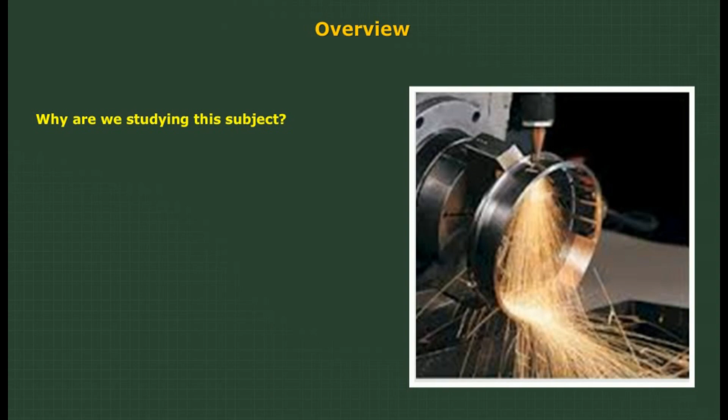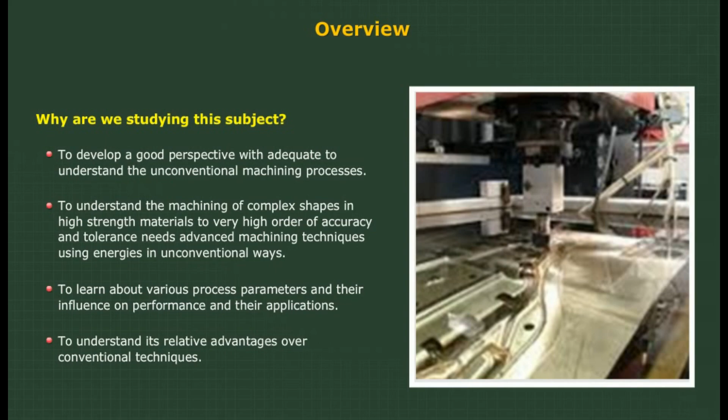To develop a good perspective to understand the unconventional machining processes, to understand the machining of complex shapes in high-strength materials to a very high order of accuracy and tolerance, needs advanced machining techniques using energies in unconventional ways, to learn about the various process parameters and their influence on performance and their applications, to understand its relative advantages over conventional techniques. How is it linked with other subjects or branches of engineering, if applicable?

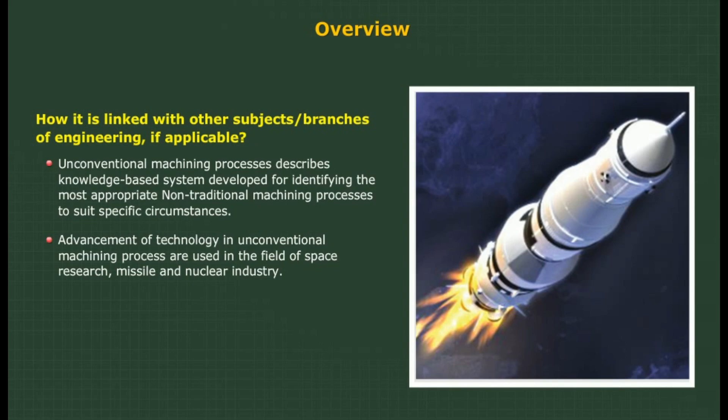Unconventional machining processes describes a knowledge-based system developed for identifying the most appropriate non-traditional machining process to suit specific circumstances. Advancement of technology in unconventional machining processes is used in the field of space research, missile and nuclear industry.

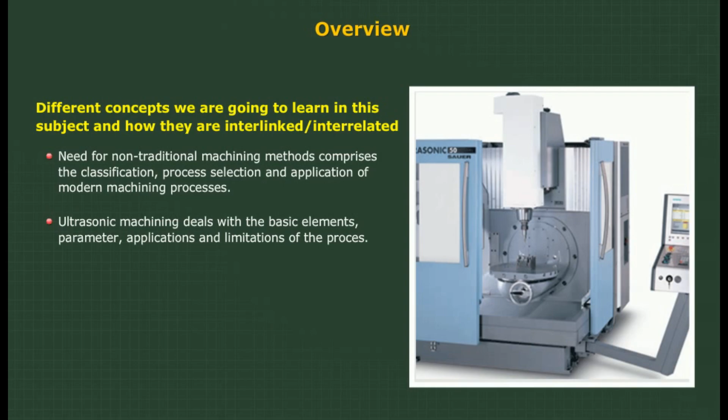Different concepts we are going to learn in this subject and how they are interlinked or interrelated. Need for non-traditional machining methods comprises classification, process selection and application of modern machining processes. Ultrasonic machining deals with basic elements, parameters, applications and limitations of the process.

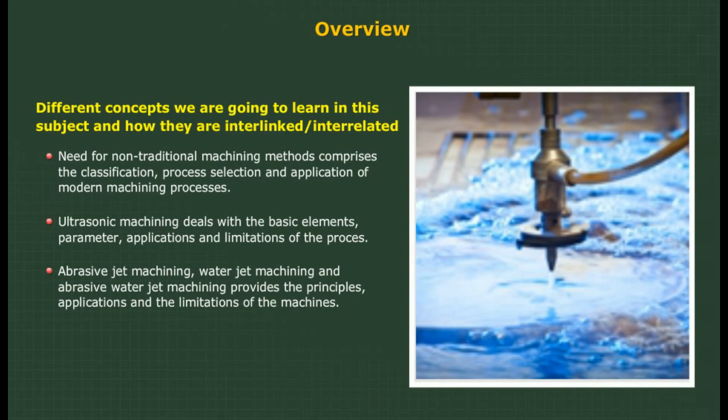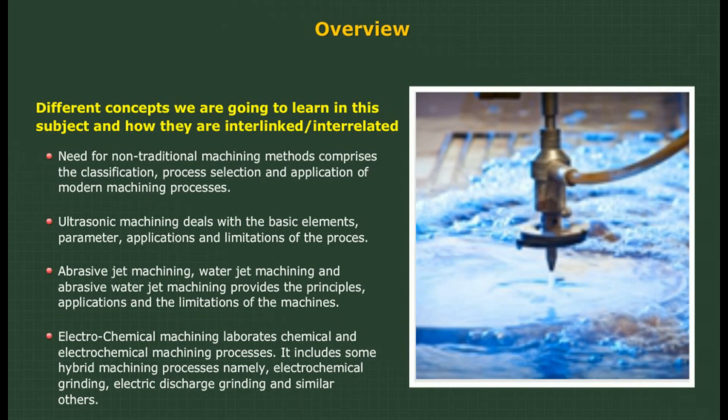Abrasive jet machining, water jet machining, and abrasive water jet machining provides the principles, applications and limitations of the machines. Electrochemical machining elaborates chemical and electrochemical machining processes. It includes some hybrid machining processes, namely electrochemical grinding, electric discharge grinding and similar others.

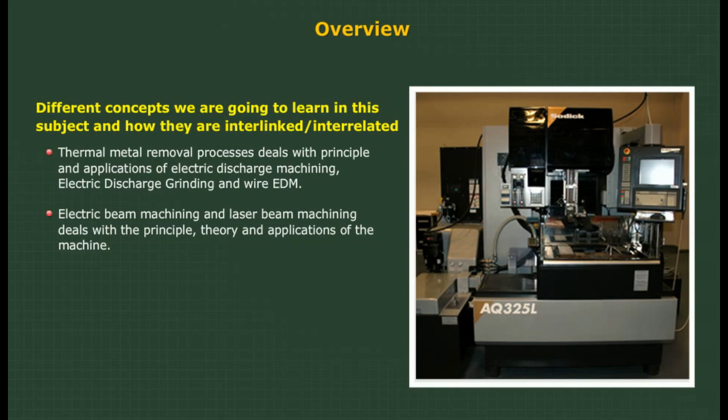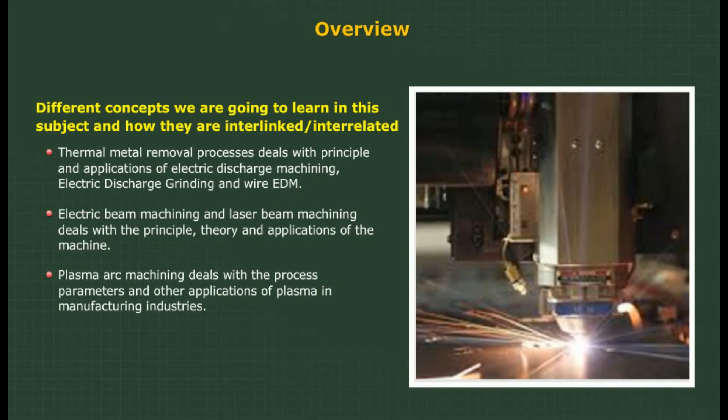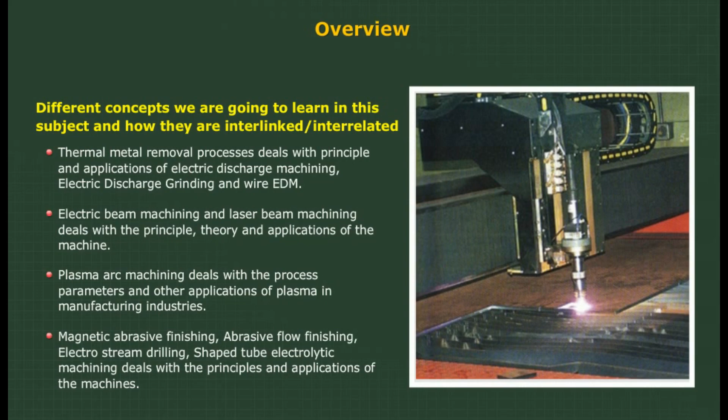Thermal metal removal processes deals with principle and application of electric discharge machining, electric discharge grinding and wire EDM. Electron beam machining and laser beam machining deals with the principle, theory and application of the machine. Plasma arc machining deals with the process parameters and other applications of plasma in manufacturing industries. Magnetic abrasive finishing, abrasive flow finishing, electro-stream drilling, shaped tube electrolytic machining deals with the principles and applications of the machines.

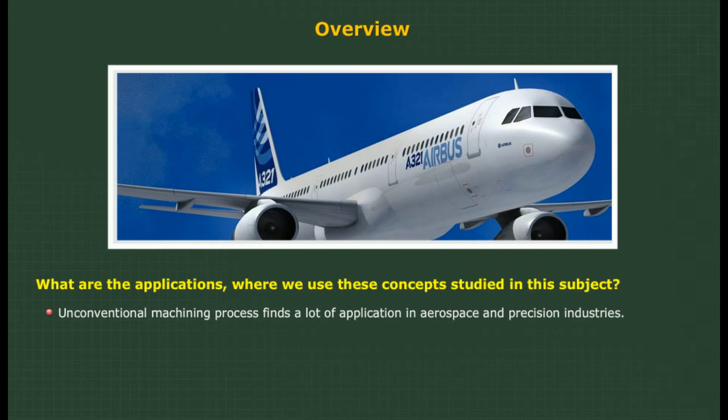What are the applications and where do we use the concepts studied in the subject? Unconventional machining process finds a lot of application in aerospace and precision industries. Advanced materials, more complex shapes, low rigidity structures and micro-machined components with tight tolerances and fine surface finish are manufactured. Rapid technological development in the field of new materials and alloys with ever-increasing strength, hardness, toughness, heat resistance and wear resistance.

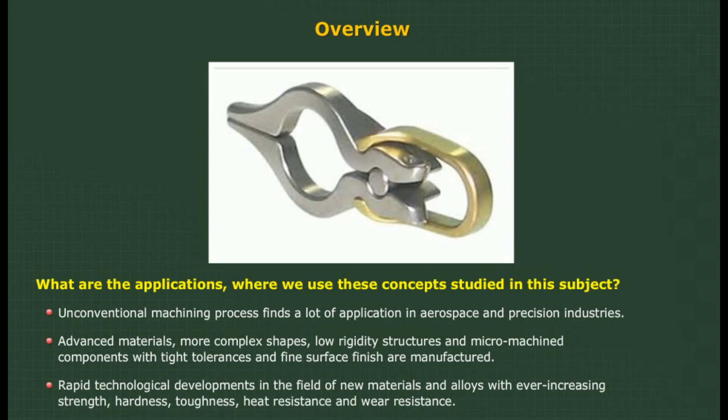Machining processes.

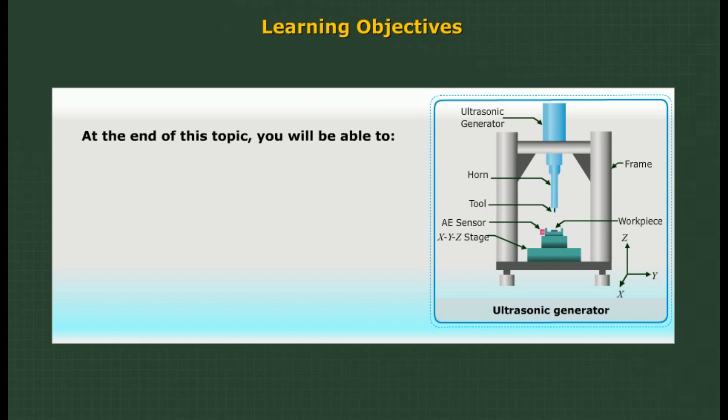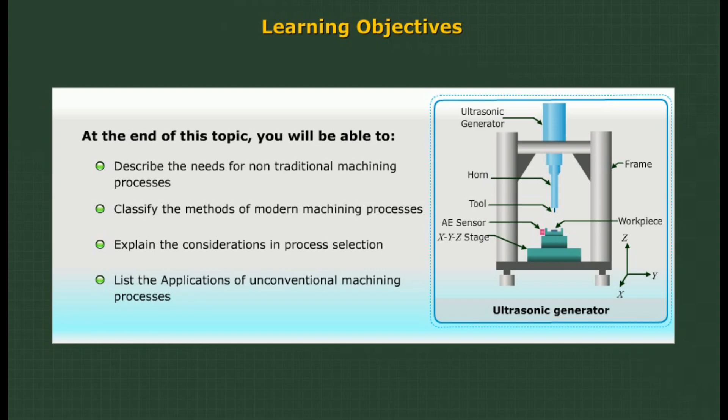Learning objectives. At the end of this topic, you will be able to describe the needs for non-traditional machining processes, classify the methods of modern machining processes, explain the considerations in process selection, and list the applications of unconventional machining processes.

Outcomes. By the end of this topic, you will be able to understand the needs for non-traditional machining processes, discuss the methods of modern machining processes, understand the considerations in process selection, and discuss the applications of unconventional machining processes.

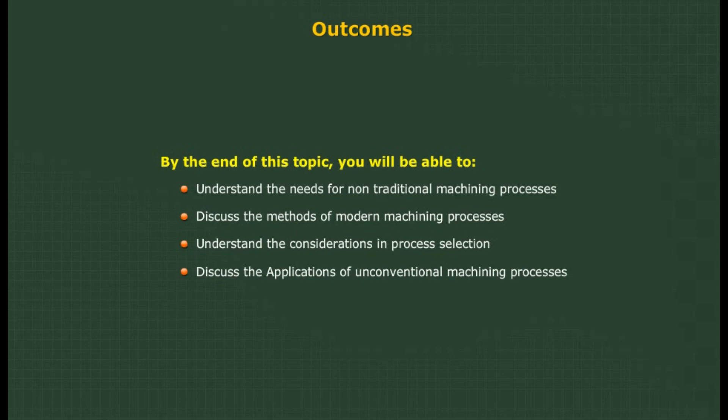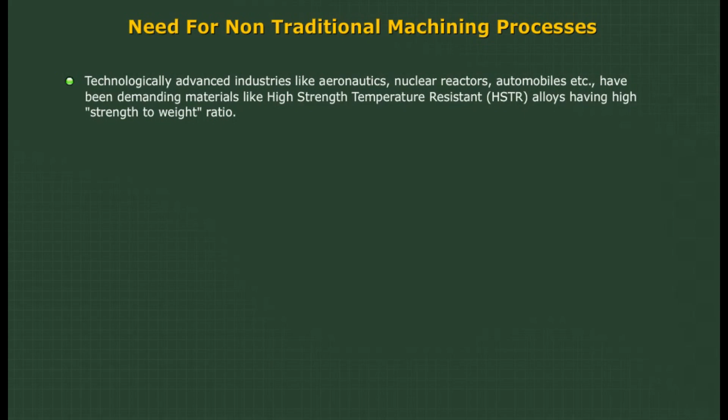Firstly, let us see the needs for non-traditional machining processes. Technologically advanced industries like aeronautics, nuclear reactors, automobiles, etc., have been demanding materials like high-strength, temperature-resistant alloys having high strength-to-weight ratio.

During conventional machining processes, an increase in hardness of the work material results in a decrease in economic cutting speed. This also needs the development of improved cutting tool materials so that productivity is not hampered.

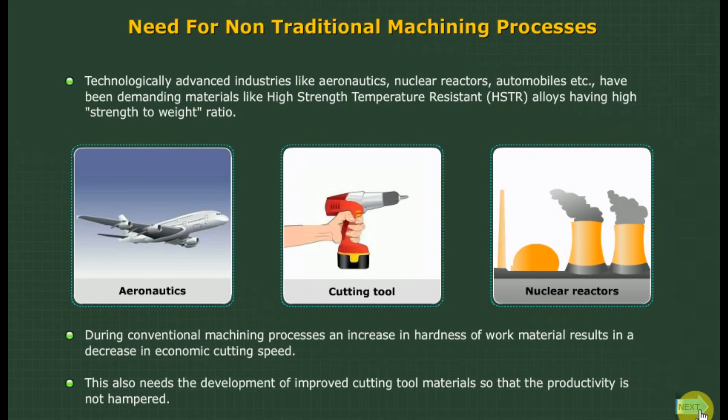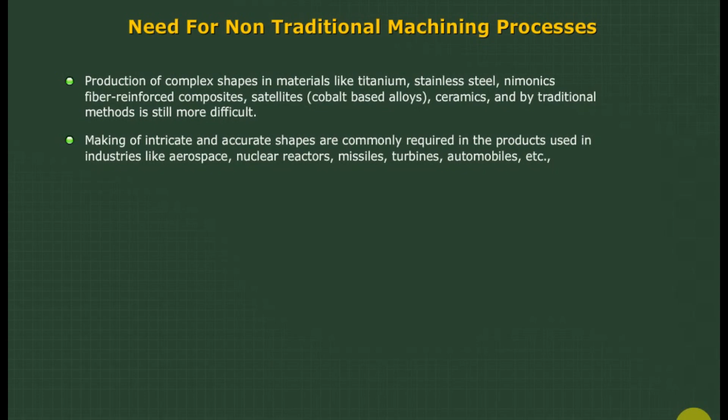Production of complex shapes in materials like titanium, stainless steel, nimonics, fiber-reinforced composites, satellites, cobalt-based alloys, ceramics, by traditional methods is still more difficult. Making of intricate and accurate shapes is commonly required in products used in industries like aerospace, nuclear reactors, missiles, turbines, automobiles, etc.

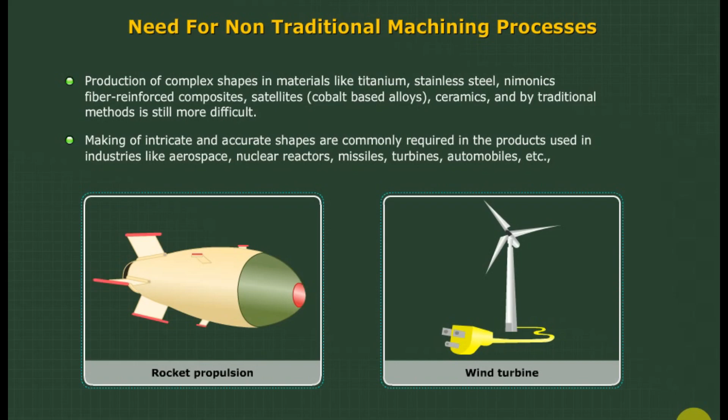By comparing the traditional and non-traditional approaches, we are able to know the differences. Mechanical energy is used as a primary source in traditional machining methods. In advanced machining methods, electrical, chemical, and optical energy sources are used.

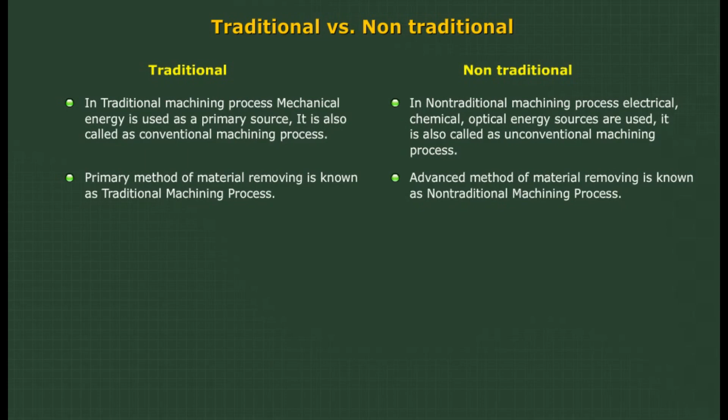The primary method of material removal in traditional methods is shearing. Non-traditional methods do not use shearing, they use erosion. Basic abrasion processes like polishing, buffing, lapping, grinding, honing, and superfinishing come under traditional machining process. Advanced processes like abrasive jet machining, ultrasonic machining, water jet machining, and magnetic abrasive finishing come under non-traditional machining process.

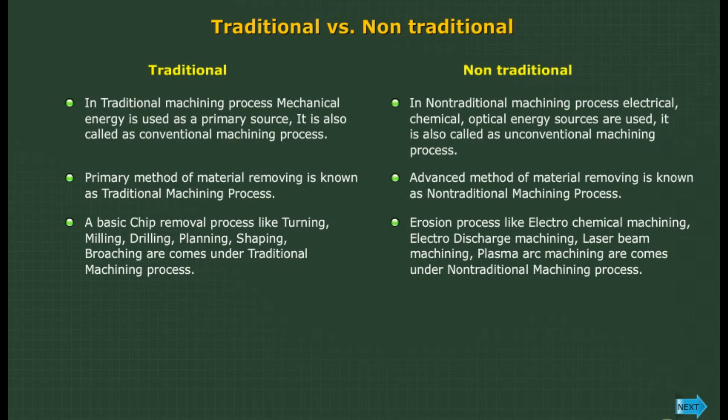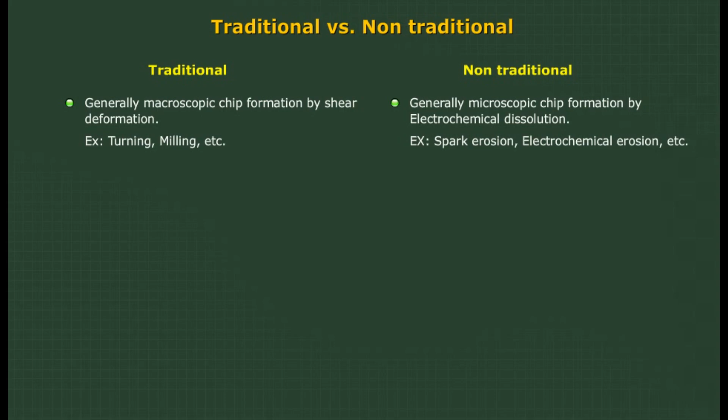Generally macroscopic chip formation occurs by shear deformation, for example turning, milling, etc. Generally microscopic chip formation occurs by electrochemical dissolution, for example spark erosion, electrochemical erosion, etc.

Non-traditional machining process, or NTM process: material removal may occur with chip formation, or even no chip formation may take place. For example, in abrasive jet machining, chips are of microscopic size, and in case of electrochemical machining, material removal occurs due to electrochemical dissolution at the atomic level.

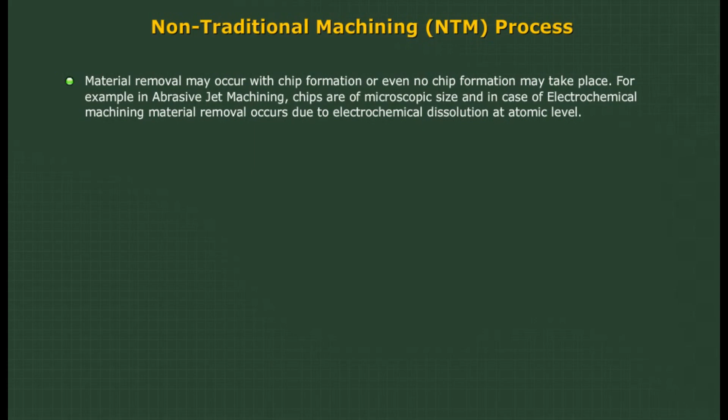In NTM, there may not be a physical tool present. For example, in water jet machining, machining is carried out by water. However, in electrochemical machining, there is a physical tool that is very much required for machining.

In NTM, the tool need not be harder than the workpiece material. For example, in electro-discharge machining, copper is used as a tool material to machine hardened steels.

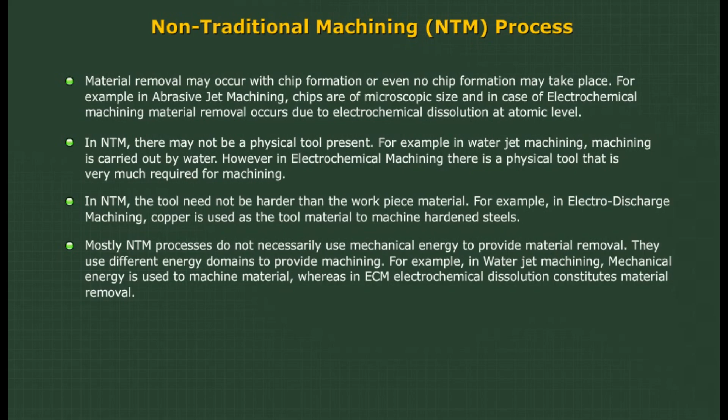Mostly NTM processes do not necessarily use mechanical energy to provide material removal. They use different energy domains to provide machining. For example, in water jet machining, mechanical energy is used to machine material, whereas in ECM, electrochemical dissolution constitutes material removal.

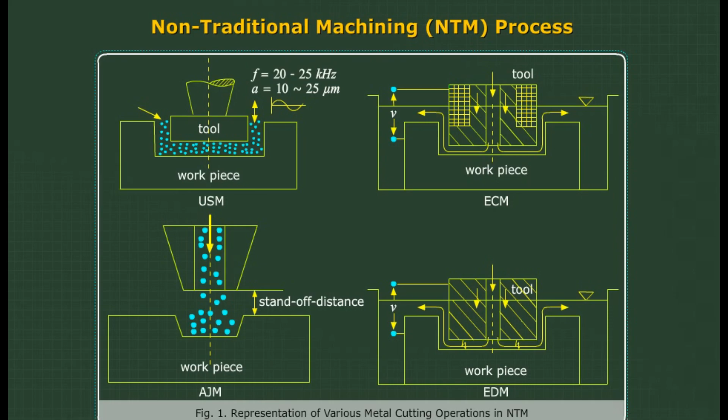Why do we go for these advanced machining processes? The growing industrial requirements in machining processes are better finish, low values of tolerances, higher production rates, complex shapes, automated data transmission, miniaturization, etc. The machine tools should be easily adaptable for automation as well.

To meet such demands, a different class of machining processes, that is, non-traditional machining processes, or more correctly named as advanced machining processes, have been developed. These newer methods are also called unconventional in the sense that conventional tools are not employed for metal cutting.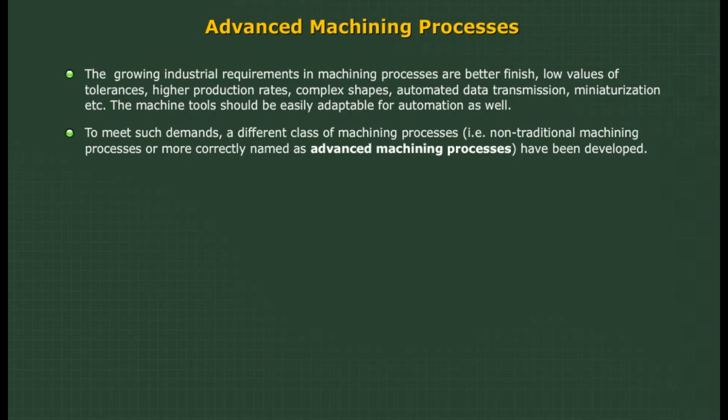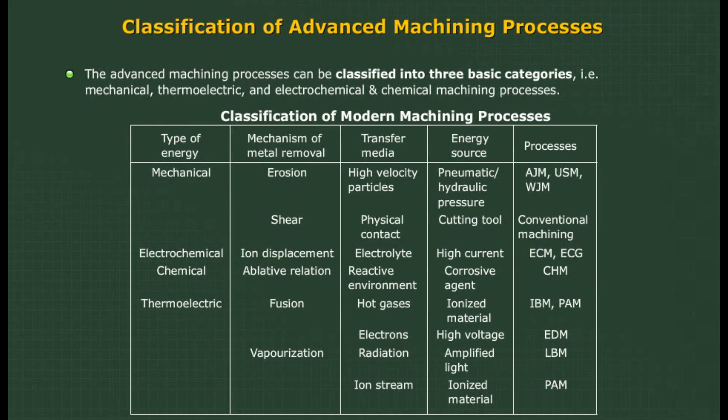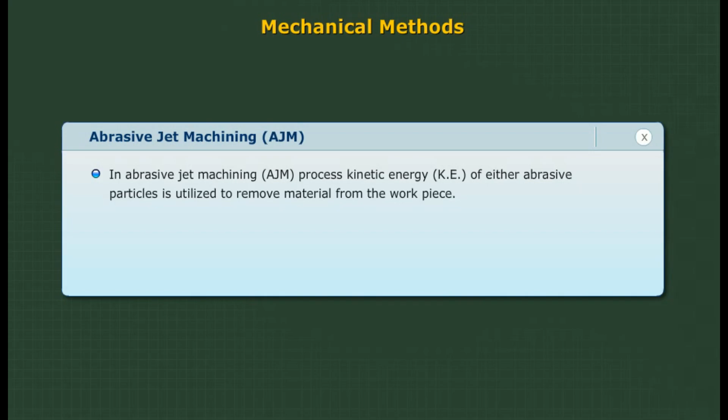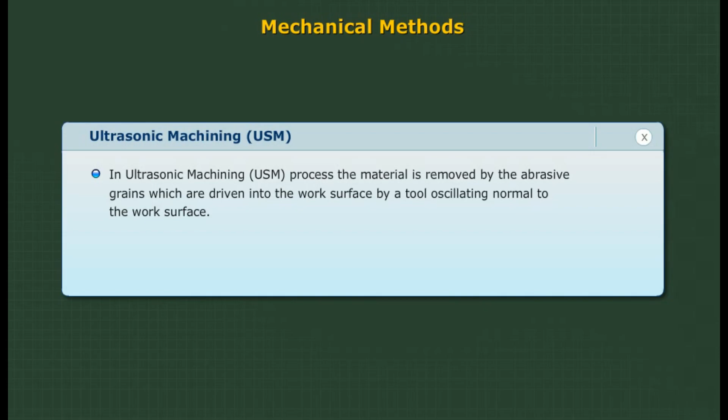There are different kinds of mechanical methods being used in industries. In abrasive jet machining, kinetic energy of abrasive materials is utilized to remove material from the workpiece. In ultrasonic machining, material is removed by abrasive grains driven into the work surface by a tool oscillating normal to the work surface. In water jet machining, kinetic energy of a water jet is utilized to remove material from the workpiece.

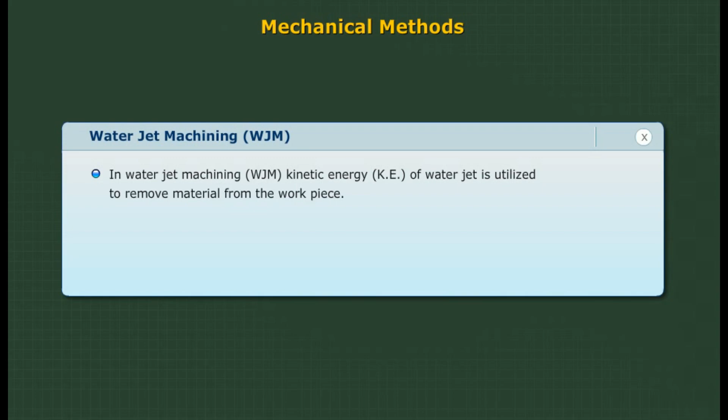Abrasive water jet machining also uses kinetic energy of abrasive materials flowing along with a water jet.

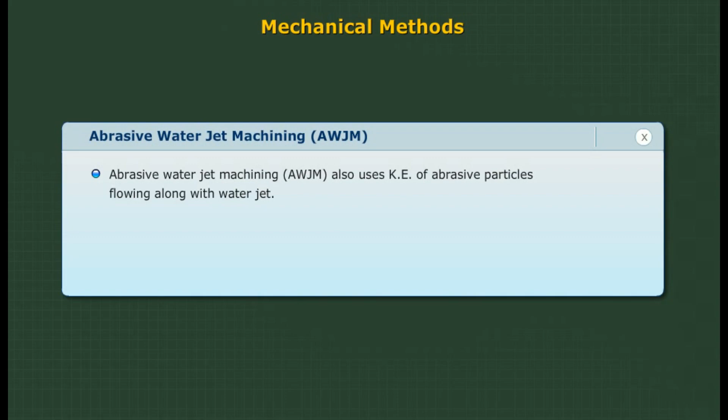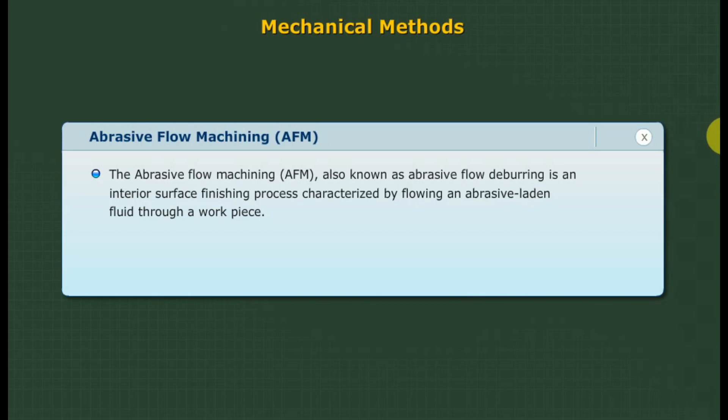Abrasive flow machining, also known as abrasive flow deburring, is an interior surface finishing process characterized by flowing an abrasive-laden fluid through a workpiece.

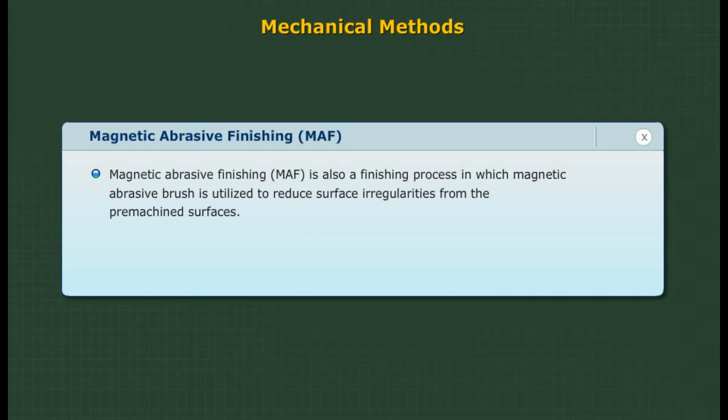Magnetic abrasive finishing is also a finishing process in which a magnetic abrasive brush is utilized to reduce surface irregularities from the pre-machined surfaces.

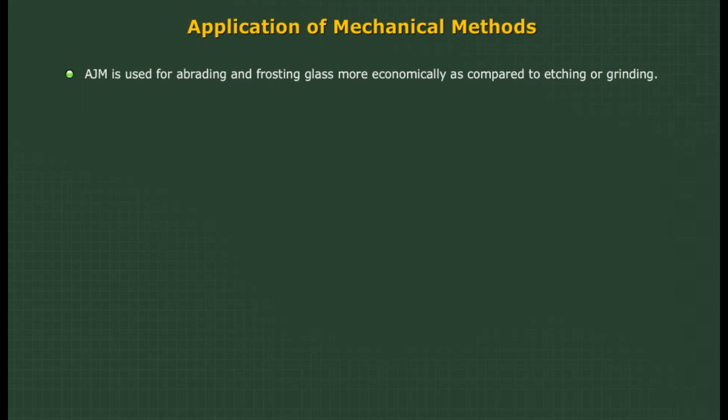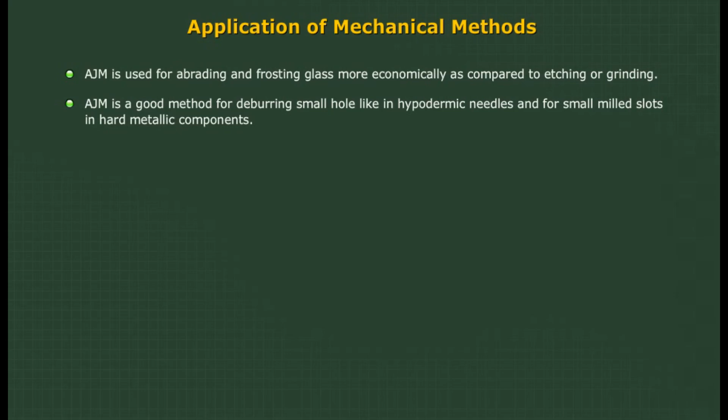Applications of mechanical methods: AJM is used for abrading and frosting glass more economically compared to etching or grinding. It is a good method for deburring small holes like in hypodermic needles and for small milled slots in hard metallic components. Ultrasonic machining is used primarily for cutting hard, brittle materials that may be conductors of electricity or insulators.

Other common applications of USM include cutting semiconductor materials such as germanium, engraving, drilling fine holes in glass, and machining ceramics and precious stones. AJM can be used for drilling, cutting, deburring, cleaning, and etching.

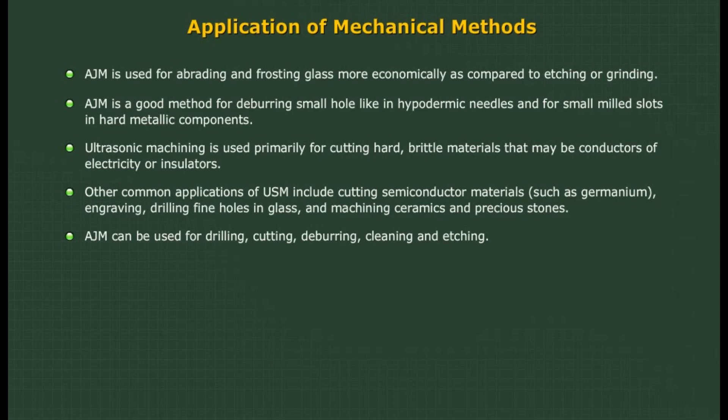Now we are going to see the different types of thermoelectric methods. Plasma arc machining is a method of metal cutting with a torch which produces a high-velocity jet of high-temperature ionized gas, plasma, that cuts the workpiece.

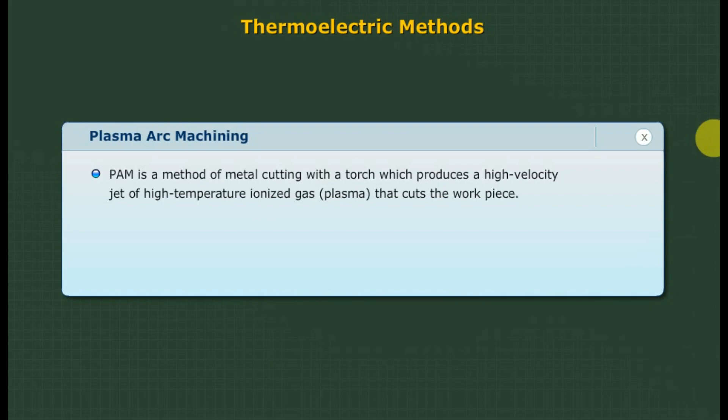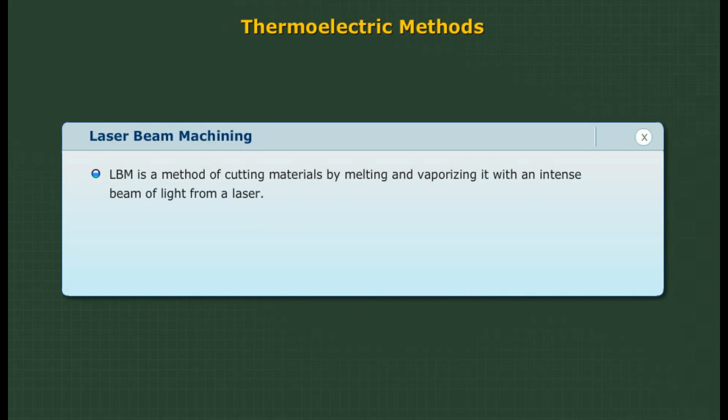Laser beam machining is a method of cutting materials by melting and vaporizing it with an intense beam of light from a laser.

The electron beam machining technique: a beam of high-velocity electrons is focused on a workpiece where the kinetic energy of the electrons is converted into heat, which vaporizes the material.

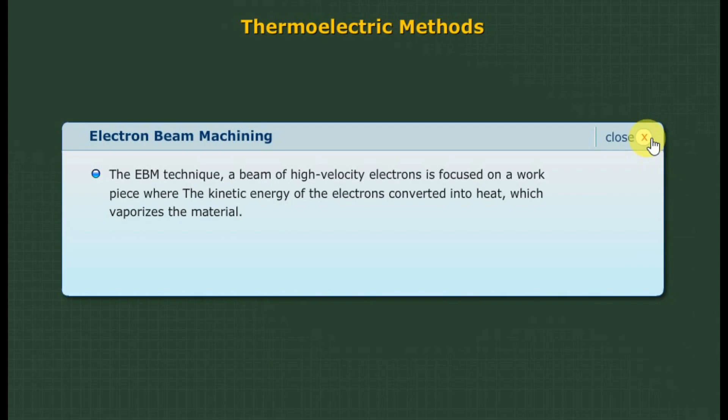Electric discharge machining is a process which is capable of machining hard and tough but electrically conductive materials economically and accurately.

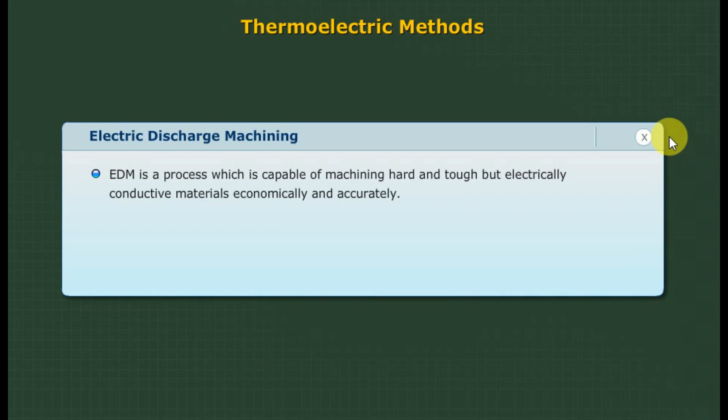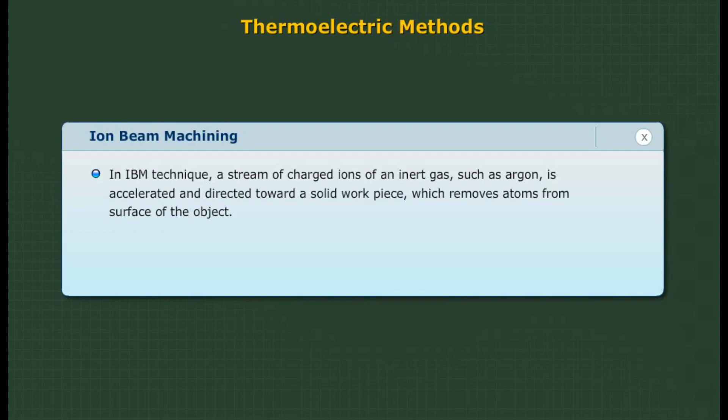In ion beam machining, a stream of charged ions of an inert gas, such as argon, is accelerated and directed towards a solid workpiece, which removes atoms from the surface of the object.

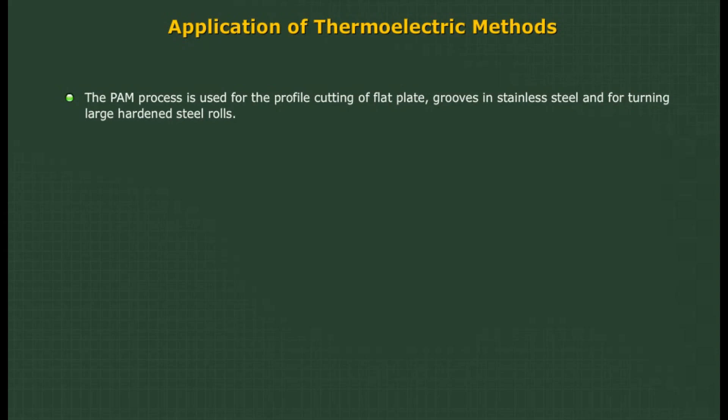Applications of thermoelectric methods: the PAM process is used for the profile cutting of flat plates, grooves in stainless steel, and for turning large hardened steel rolls.

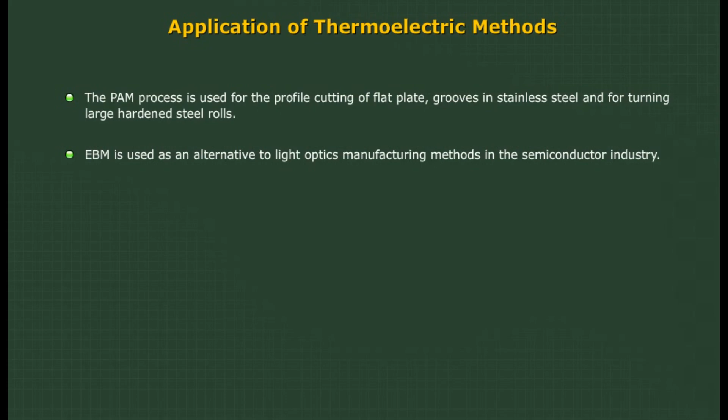EBM is used as an alternative to light optics manufacturing methods in the semiconductor industry. Welding can also be done with an electron beam, notably in the manufacture of aircraft engine parts.

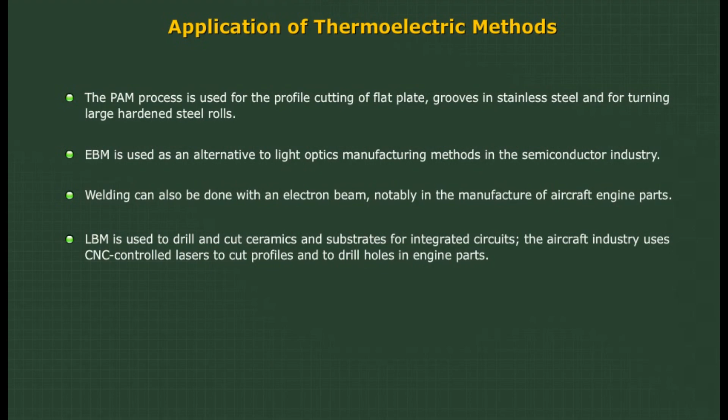LBM is used to drill and cut ceramics and substrates for integrated circuits. The aircraft industry uses CNC-controlled lasers to cut profiles and drill holes in engine parts.

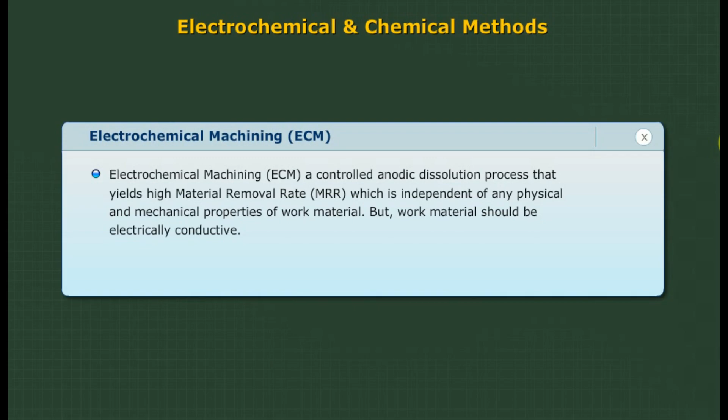The types of electrochemical and chemical methods are: electrochemical machining, a controlled anodic dissolution process that yields high material removal rate independent of any physical and mechanical properties of the work material. But the work material should be electrically conductive.

Chemical machining is an etching process which has a very narrow range of applications, mainly because of very low MRR and difficulty in finding a suitable etchant for the given work material.

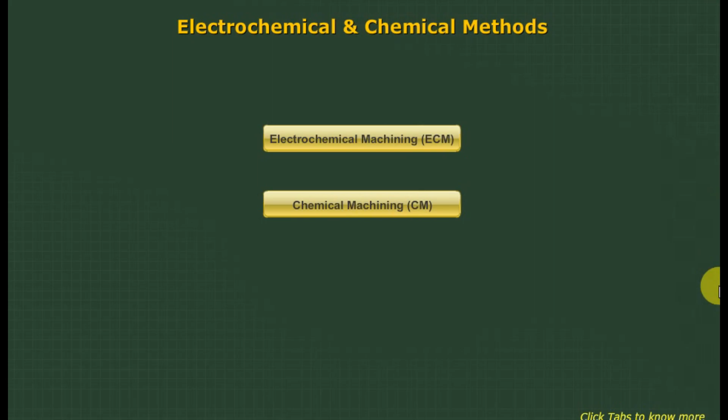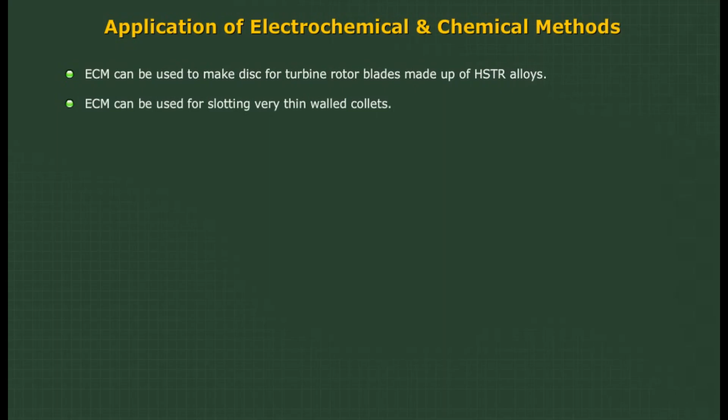Applications of electrochemical and chemical methods: ECM can be used to make discs for turbine rotor blades made up of HSTR alloys. ECM can be used for slotting very thin-walled collets.

ECM can be used for copying of internal and external surfaces, cutting of curvilinear slots, machining of intricate patterns, production of long curved profiles, machining of gears and chain sprockets, production of integrally bladed nozzles for use in diesel locomotives, production of satellite rings and connecting rods, and machining of thin, large diameter diaphragms.

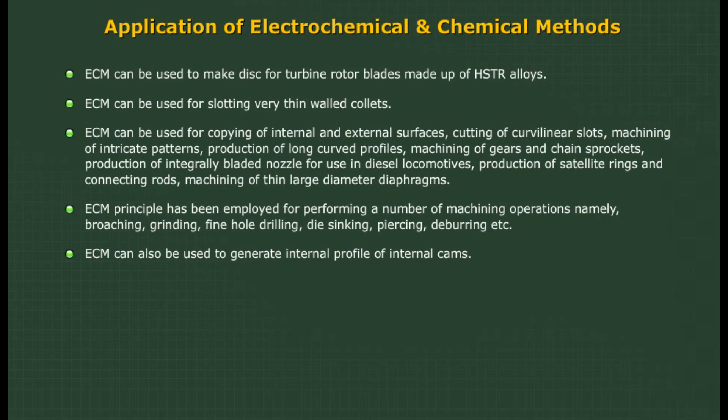The ECM principle has been employed for performing a number of machining operations, namely turning, planing, broaching, grinding, fine hole drilling, die sinking, piercing, deburring, plunge cutting, etc. ECM can also be used to generate internal profiles of internal cams.

Now we are going to see the considerations in process selection. To make efficient use of modern machining processes, it is necessary to know the exact nature of the machining problem.

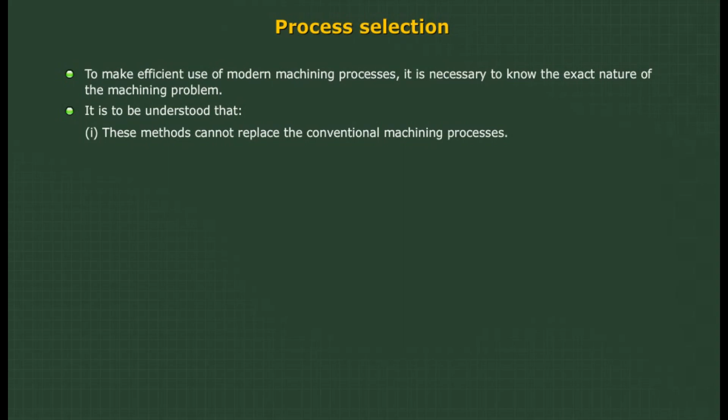It is to be understood that: 1. These methods cannot replace the conventional machining processes. 2. A particular machining method found suitable under given conditions may not be equally efficient under other conditions. A careful selection of the process for a given machining problem is therefore essential.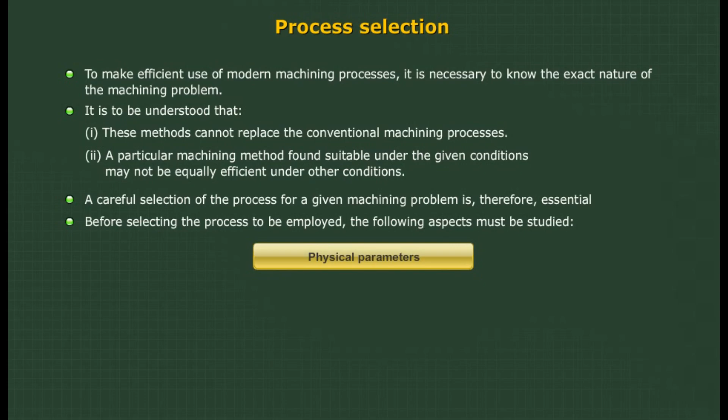Before selecting the process to be employed, the following aspects must be studied: 1. Physical parameters. 2. Properties of the work material and the shape to be machined. 3. Process capability. 4. Economic considerations.

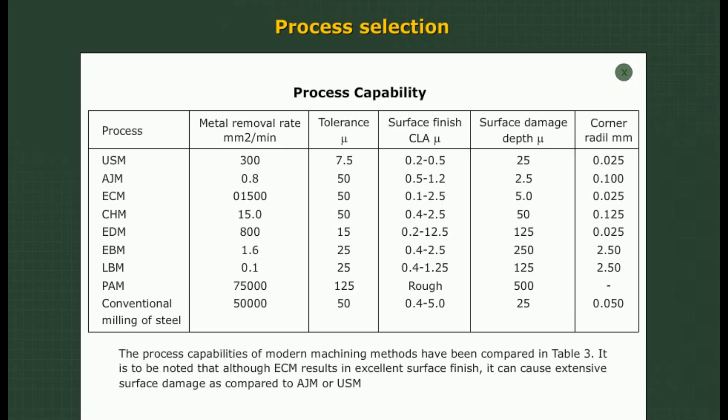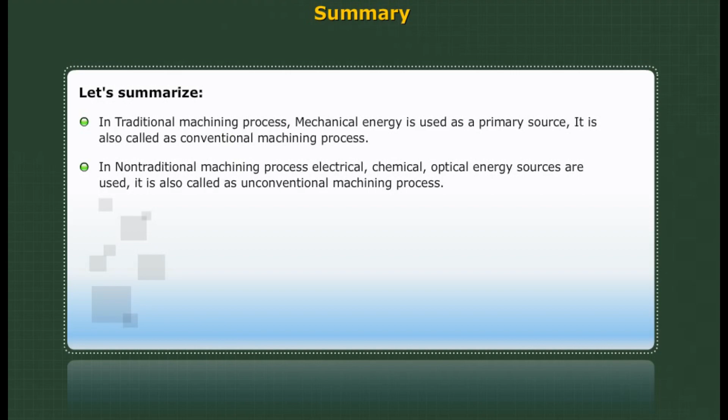In non-traditional machining process, electrical, chemical, and optical energy sources are used. It is also called unconventional machining process.

In NTM, the tool need not be harder than the workpiece material. For example, in electric discharge machining, copper is used as the tool material to machine hardened steels. Performance of NTM processes does not depend upon hardness, strength, and other physical and mechanical properties of the work material.